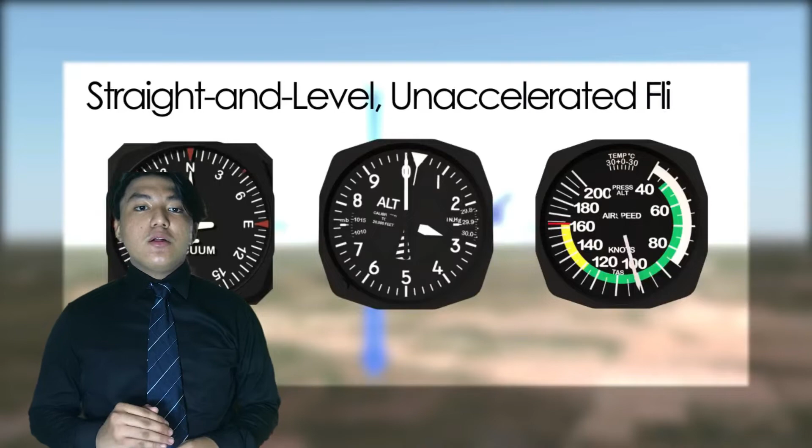Finally, there is drag. Drag is the force acting in a direction opposite of thrust, which fundamentally limits the performance of the airplane. When an airplane is maintaining its heading, altitude, and airspeed, it is said to be in straight and level or unaccelerated flight. In an unaccelerated flight, lift equals weight and thrust equals drag.

Let's talk about flight controls. The flight controls consist of various surfaces around the aircraft that manipulate the aerodynamic forces of the plane, allowing the pilot to control the aircraft. Aircraft flight controls are broken into two systems: primary and secondary flight controls. The three primary controls are the ailerons, elevator, and rudder. The secondary flight controls are the flaps and trim.

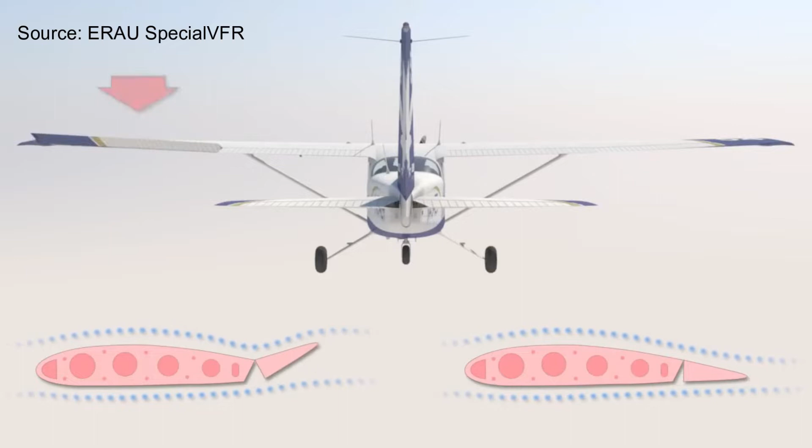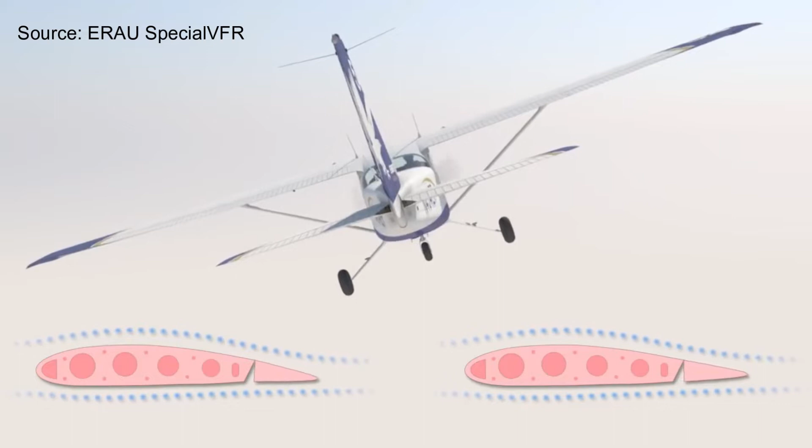Ailerons are located at the back end of the wings and control the aircraft in roll, or the longitudinal axis. When the pilot moves the controls to the left, the left aileron is deflected up, creating a downward force, and the right aileron is deflected down, creating an upward force, which results in the airplane rolling to the left. The opposite happens when the pilot moves the controls to the right.

The elevator is attached to the back of the horizontal stabilizer and controls the airplane's pitch, which allows the airplane to climb or descend. Finally, the rudder, which is controlled by the rudder pedals and attached to the back end of the vertical stabilizer, controls the airplane's vertical axis, allowing the nose of the airplane to slide to the left or right.

Flaps are primarily used to help increase lift during takeoff and landing. This allows the airplane to fly at lower airspeeds and make steeper approaches to landing. Trims are used to make the pilot's job easier. They allow the airplane to essentially fly itself with fewer control inputs by the pilot, helping the airplane relieve pressure.

Now let's go to the major components of an aircraft. We have 5 major components: the fuselage, the wings, the empennage, the landing gear, and the power plant.

The fuselage is the main section or body of the airplane. This is where you'll find passengers, cargo, and the flight crew. The fuselage is the foundation for the structure of the aircraft. Most airplanes manufactured today use something called semi-monocoque construction. This means that underneath the skin of an airplane, there are a series of bulkheads and other supports that help hold the airplane together.

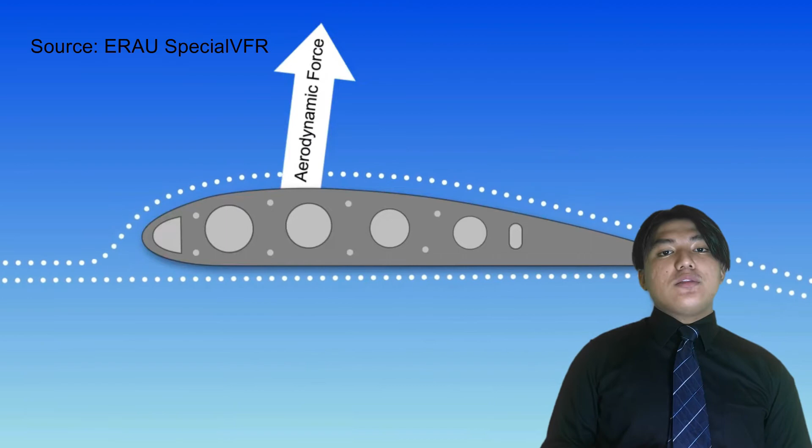Looking at a cross-section of a wing, we can understand how lift is generated. A wing is a type of airfoil that generates an aerodynamic force as a fluid, in our case air, moves around it. In addition to the wings, all the flight control surfaces, as well as the propellers, are considered airfoils. The aircraft's fuselage also has an airfoil, but it's not as good at producing lift.

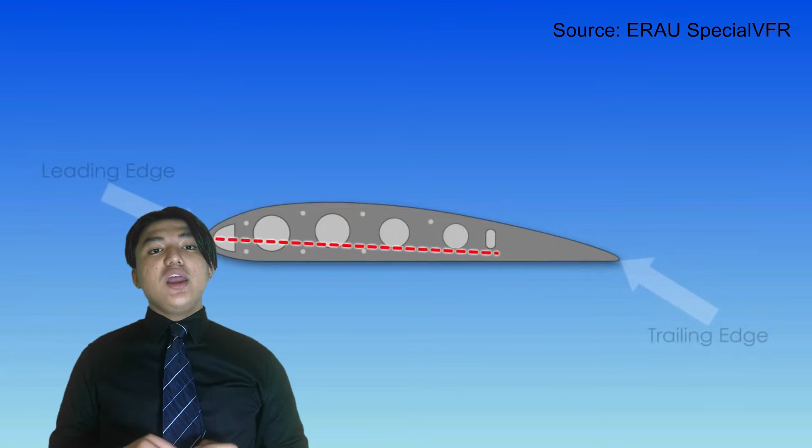There are a few parts of an airfoil. The forwardmost point of an airfoil is called the leading edge. The aftermost point is called the trailing edge. If we connect these together with an imaginary line, this line is called the chord line.

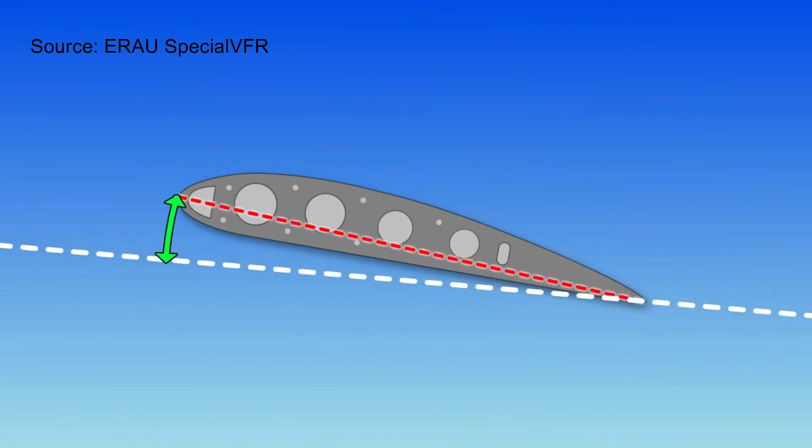As an airplane flies through the air, the path that the plane travels along is called the flight path. The air that flows through the airfoil as it travels is known as relative wind. Therefore, as you can see, the relative wind is parallel to but opposite to the flight path. The angle between the airfoil's chord line and the relative wind is called the angle of attack. The angle of attack is the major factor in how much lift the wings generate.

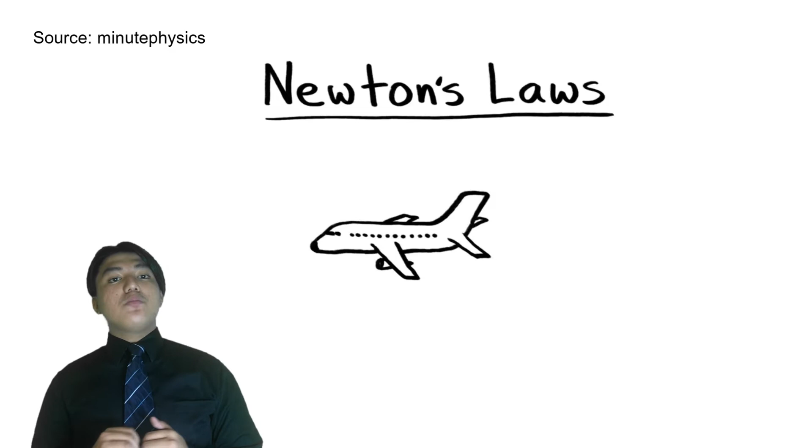Now that we know how airplanes fly, let us see how the airplane stays in the air. The airplane stays in the air because of one single fact: there is no net force on it. And with no net force, an object at rest stays at rest, and an object in motion remains in motion, even if it's mid-air 10 kilometers above the Earth's surface.

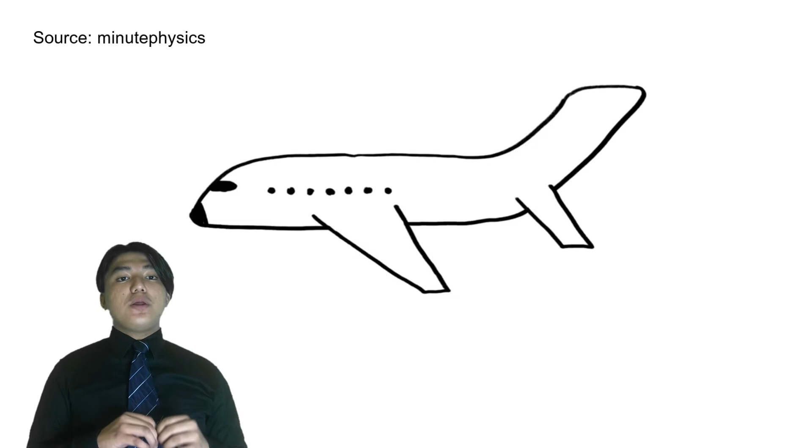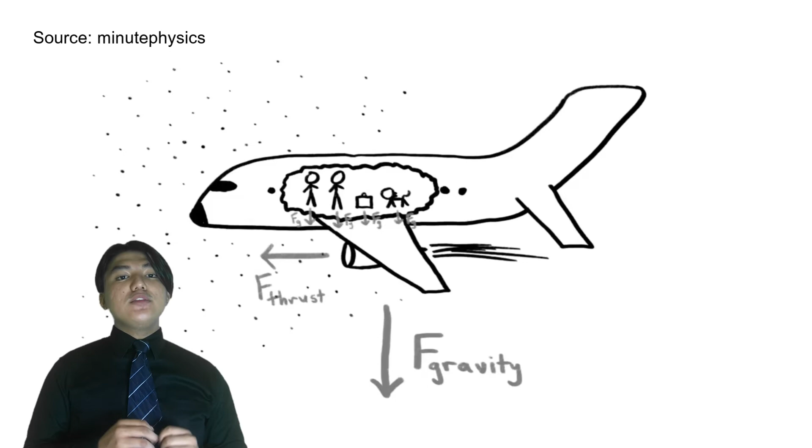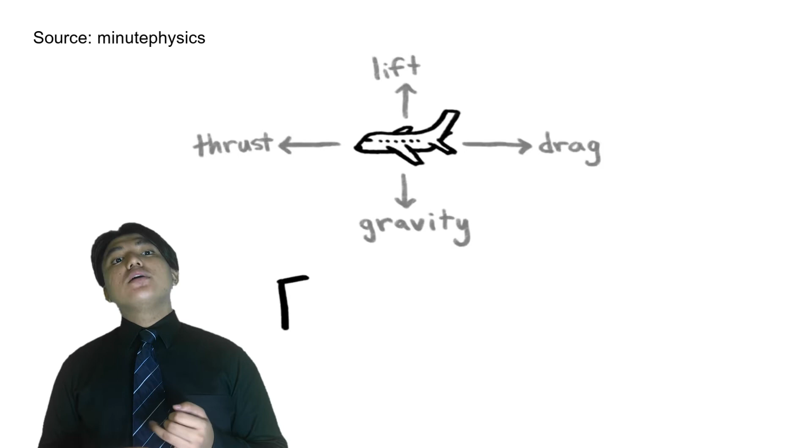Now, the main reason why airplanes fly is basically because of the design of airfoils. Like I said, airfoil-shaped surfaces can be found on the airplane wings, tail, and propeller blades, or even the fuselage itself. The Bernoulli equation states that increasing velocity leads to a decrease in pressure. Thus, the higher the velocity of the flow, the lower the pressure.

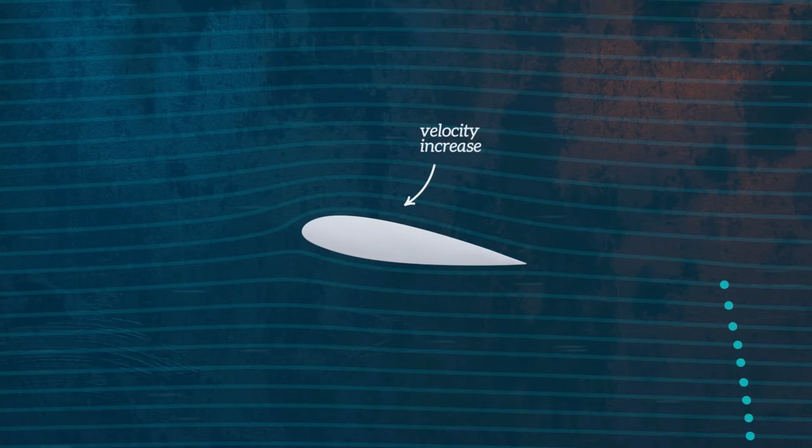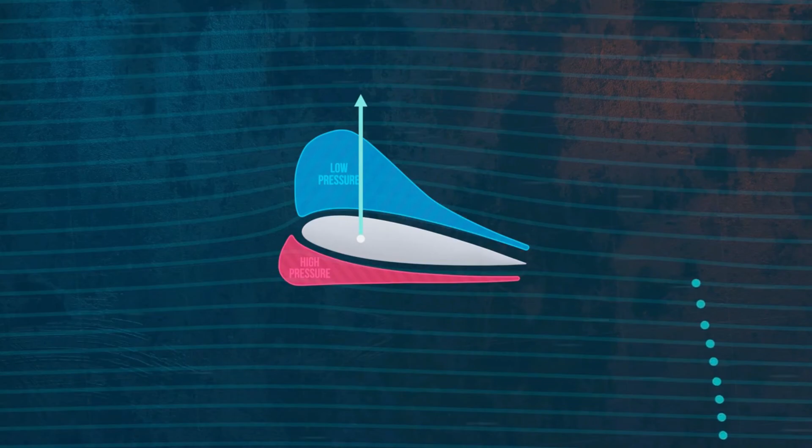Air flowing over an airfoil will decrease in pressure. The pressure lost over the top of the surface is greater than that of the bottom surface, which causes the airplane to lift. By applying Newton's law of motion and Bernoulli's principle of differential pressure, we can define how an airplane flies and stays in the air.